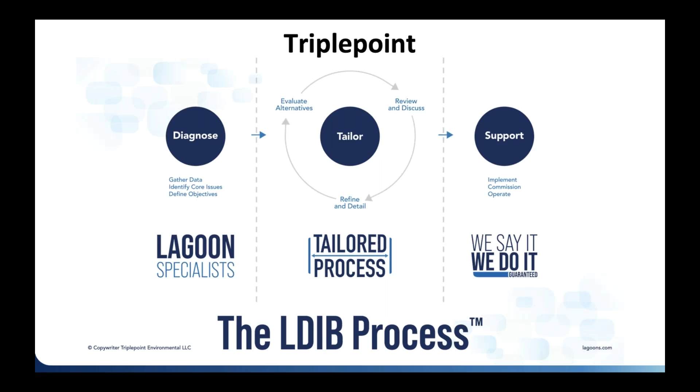So recirculation - I always crack this joke. It's like we've all seen the pharmaceutical commercial where they're like, do you have problems with lagoon DO, algae, effluent ammonia, effluent BOD, effluent TN, effluent concentration volatility? Well, you should talk to your doctor about lagoon recirculation, because lagoon recirculation is something that can help with all of these things. I'll go through this in this presentation, but we first learned about lagoon recirculation from Steve Harris.

Steve is a consummate lagoon expert. We worked with him co-hosting a bunch of training for lagoon operators in Missouri and Iowa and other parts of the country, and also doing webinars. Part of what he did was he was always hired by the EPA or state EPAs to come in and solve lagoon problems - this lagoon's not working, solve this problem. And a lot of times he would recommend recirculation.

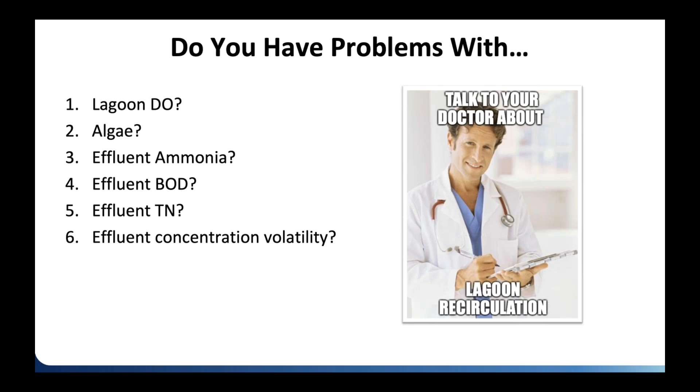And it's actually not really a new concept. It's something that's actually been borrowed from activated sludge. Activated sludge has been doing recirculation for a really long time. What it is, simply, is moving water from one part of the lagoon system to another part. So it might be pulling out of the effluent pond and putting it into the primary pond - that would be a very common application. But really, you can put water anywhere you want in the system.

And I'll explain why it helps. Some people get confused by this, the recirculation of water. We typically recommend about 1 times your average daily flow. So if your average daily flow is 100,000 gallons a day, we recommend recirculating 100,000 gallons a day to the front.

And sometimes initially people look at this and get confused, like, wow, that's a lot of flow. What happens to all this flow if we're sending 100% of what we bring into the plant to the front? Do we discharge? I think what's important to know is this sort of sounds like circular logic in a certain sense. It takes a minute to get your head wrapped around it.

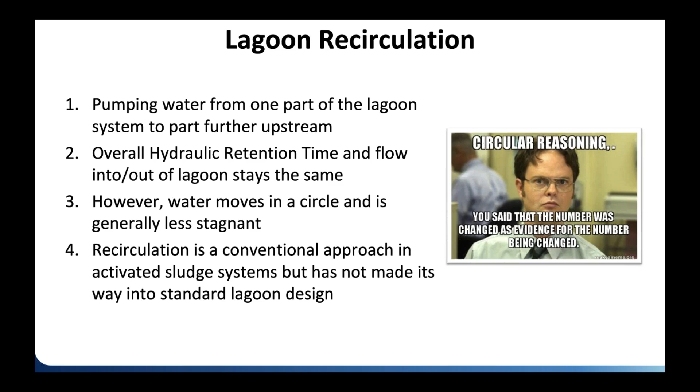That might be true for where you're circulating water from the back to the first lagoon, and you might not discharge for a few hours while the whole system equalizes. But ultimately, the time that the water stays in your lagoon system, what we call hydraulic retention time, remains the same.

And so this is the equation for hydraulic retention time. Very simple equation. It's the number of gallons per day flow you've got coming into your lagoon divided by the volume of the lagoon.

With recirculation, if you look at this equation, you're not adding flow to the lagoon. What's coming in from your collection system is remaining the same. The volume is not changing either. So water does come in and flow back out. It just goes around in a circle one more time than it would have.

If you think about it in terms of a gallon of water coming in, and we could watch it as it goes through the system, it would stay in the system for the same amount of time. It would just go around the circle twice. At the end of the day, the equation stays exactly the same for recirculation.

It's pretty interesting. I've always gotten a little confused by it initially, until I really started thinking about it and got back to this equation, and that made a lot of sense to me. I'm like, oh yeah, of course, we're not changing the hydraulic retention time. We're just moving the water around more.

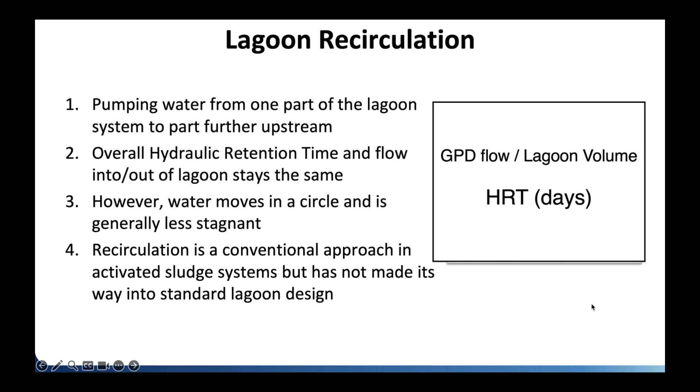As your BOD decreases, your DO tends to increase, which makes sense because BOD is biochemical oxygen demand, with an emphasis on oxygen. At the beginning of your influent, you've got a lot of this BOD in the water that's consuming oxygen. As it moves through the system, that depletes the dissolved oxygen. And as it moves through and you get less and less BOD, the water is able to hold more oxygen.

At the back of the plant, you tend to have about 5 or 6 milligrams per liter of oxygen. At the front of the plant, you tend to have a lot less - sometimes 1 or under 1 milligram per liter of dissolved oxygen. So if you need more DO at the front, then pumping water from the back to the front helps to boost your oxygen levels in the first lagoon. Makes a lot of sense.

The second reason you tend to get a lot more oxygen at the back is that you grow algae, typically at the back of your plant. Algae, like any plant, when sunlight is on it, photosynthesizes and converts carbon dioxide to oxygen, and that turns up as DO in the water. So that algae helps boost oxygen at the back of the plant. Again, you can take that, move it to the front of the plant, and give yourself a little oxygen boost.

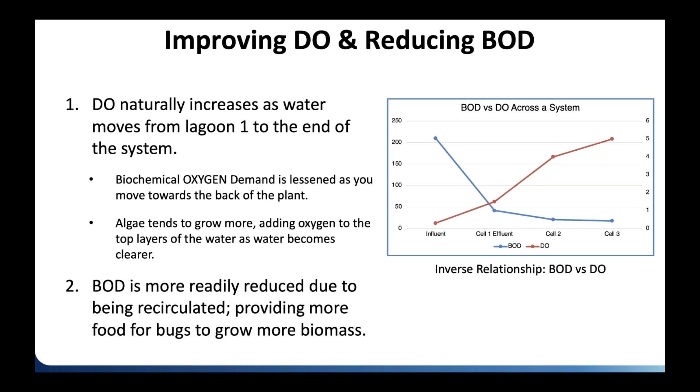It's really simply a matter of giving that BOD a second chance, a second bite at the apple to break down where there are bugs that will eat it at the front of the lagoon.

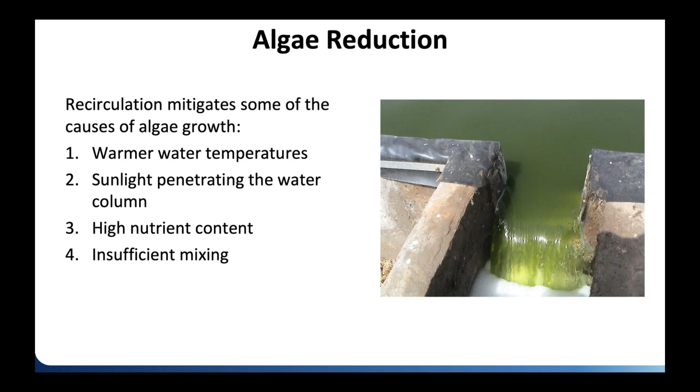There are other methods. We're going to have a whole webinar on algae coming up that will deal with how to mitigate an algae issue as it shows up. So I don't want to sit here and say this is going to solve your algae issue - it's not going to solve it per se, but it will certainly help a little bit.

All right, so let's talk about how recirculation can help with reducing nitrogen levels in your lagoon system. Before we get into that and talk about some case studies around this, let's just do a quick chemistry lesson on what nitrogen is, okay?

There are different forms of nitrogen that make up total nitrogen. First you've got ammonia and ammonium, NH3 and NH4 respectively. These together are ammonia nitrogen.

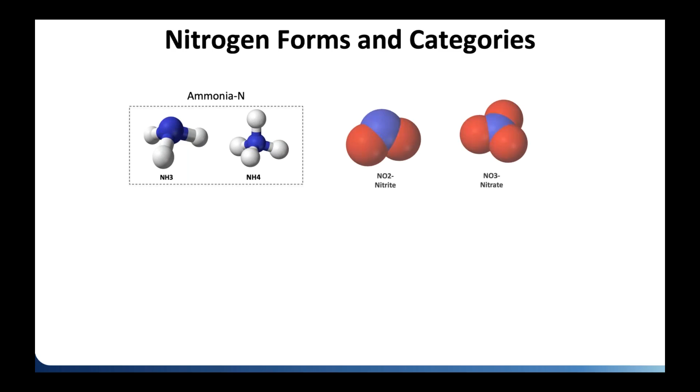Then you have nitrite and nitrate, and finally organic nitrogen. All these things together make up total nitrogen. So think of it as an adder: it's ammonia plus nitrite plus nitrate plus organic nitrogen.

We'll talk about nitrification in the next slide, but what you do when you nitrify is convert the ammonia into nitrate. So you're really not removing the total nitrogen, you're just converting one form of nitrogen to another.

Now, the different terms you hear about nitrogen include TKN, or total kjeldahl nitrogen. This is simply the combination between ammonia nitrogen and organic nitrogen. It's important to know what your organic nitrogen is.

In lagoons, it's harder to directly treat for organic nitrogen. Because the organic nitrogen can sit in the lagoon for a while, sometimes it will get hydrolyzed and turn into ammonia. But ultimately, there's always going to be a component of the effluent stream that's organic nitrogen, which is basically impossible to treat for in a lagoon system. So it is important to know.

If you're a typical standard municipal lagoon, you'd typically see about 3 to 4 milligrams per liter of organic nitrogen on your effluent, maybe even 5 or 6. If you have an industry coming in, your organic nitrogen might be a lot higher.

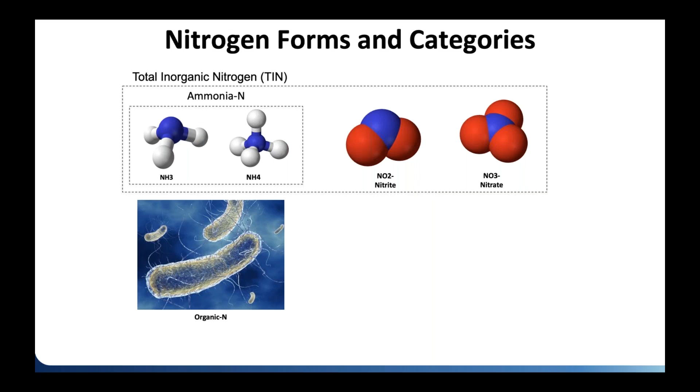It will indirectly do it throughout the process and hydrolyze some of that organic nitrogen into ammonia, but ultimately there's still always going to be some organic nitrogen, and it's not something lagoon operators can really control. So I always like it - if you're going to give a limit to somebody, at least give them a limit for something they can control, like total inorganic nitrogen versus just total nitrogen, which has that organic component you can't control.

So with recirculation, the premise is that you can accomplish total nitrogen removal. With a municipal lagoon, most of your nitrogen coming in is ammonia - the vast majority of it. So the first thing you have to do is convert that ammonia first into nitrite, then into nitrate. You do that by growing nitrifiers.

Now we have an entire webinar on nitrification, which you can look up on our Lagoon University website. I won't go into too much more detail other than the process. Then once you get into that nitrate form, you can convert it from nitrate to nitrogen gas. Really cool process, right? You're literally taking the nitrate out of the water and it just off-gases into the atmosphere and it's gone.

So why would you want to denitrify? The obvious reason is you've got a total nitrogen limit or total inorganic nitrogen limit, then you've got to meet that limit, so you have to denitrify. That's fine, but I'd argue there are benefits to denitrifying even if you don't have a limit. Here are the two primary ones that I see.

First of all, for every 1 milligram per liter of nitrate denitrified, you get 3.57 milligrams per liter of alkalinity that is produced. This is cool - it's a cool feature, it just gets produced and put in the water. Why do you care about that?

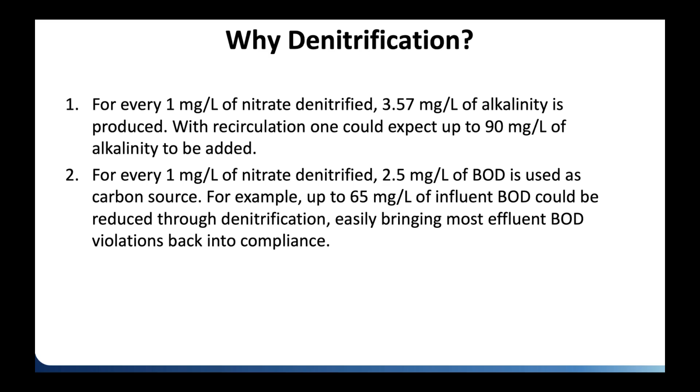If you want to do anaerobic digestion, that's free, except it's very, very slow. So there are 2 really good reasons to do this, even if you don't have a limit.

So the rub is that most of your total nitrogen coming in is from ammonia. You have to nitrify it to make nitrates, to convert it into nitrates, before you can denitrify it. So what do you need to nitrify? Well, you need low BOD, you need alkalinity, you need ammonia, and you need high DO, okay?

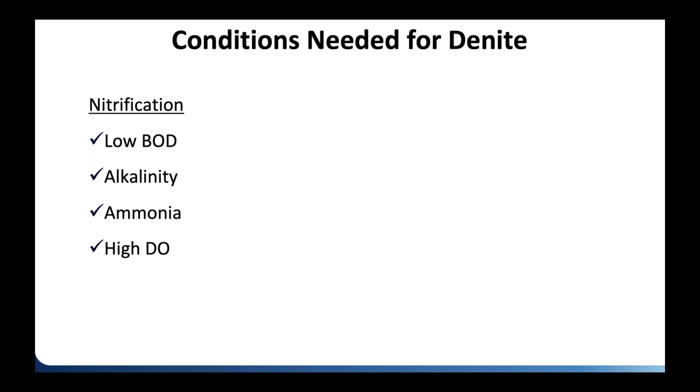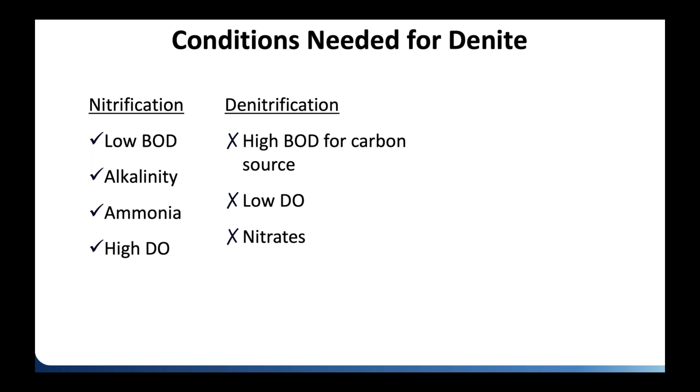Now, the problem is that a lot of the things you need to denitrify are the opposite of what you need to nitrify. If you're trying to denitrify, you need nitrates, so you've got to get rid of the ammonia and turn it into nitrates. You need low DO, you want under 0.5 milligrams per liter of dissolved oxygen or lower, and you want BOD because you need that as a carbon source.

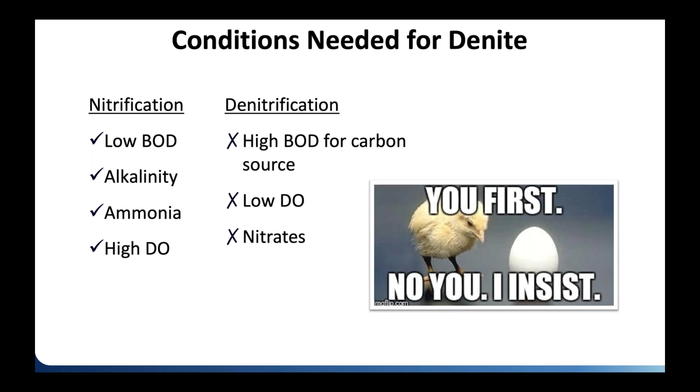So it's the quintessential chicken and egg situation, because in order to denitrify, you have to nitrify first, but in order to denitrify you need a lot of the opposite conditions you need to nitrify. So this is where recirculation comes in, okay?

This is our process. This is the way we approach it. You could do it a lot simpler than this, but I'm going to explain our process and why we do it the way we do it.

In our process, we start with BOD treatment in these aerated lagoons. Then we run it through our NitrOx ammonia removal process, which will basically nitrify any water at pretty much any temperature, especially within a municipal system. The only caveat is the water can't be an ice cube. But other than that, it'll nitrify it, create those nitrates, and then we pump that water back, blend it with the influent water coming in from the collection system, and put that into an anoxic lagoon right at the front of the process.

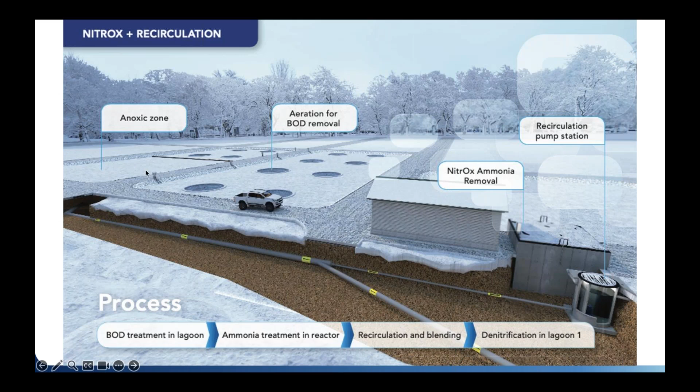So modeling: there isn't a specific biological model available for this type of denitrification. We are actually trying to develop that by doing piloting and gathering more data so we can get more predictability about it. But off the bat, we sat down and said, okay, let's just think about this for a second, theoretically make some assumptions and see where we go.

Now, in reality, I can say today that we probably get 90 to 95% nitrate removal within a pre-anoxic lagoon. So really, really high rates of removal. But you do want to recirculate more.

It makes sense because in order to get rid of nitrates, you have to take the nitrates and put them somewhere where they can degrade, and that's in that pre-anoxic lagoon. So the more of those nitrates you put back in the front, the more they're going to degrade. Totally makes a lot of sense.

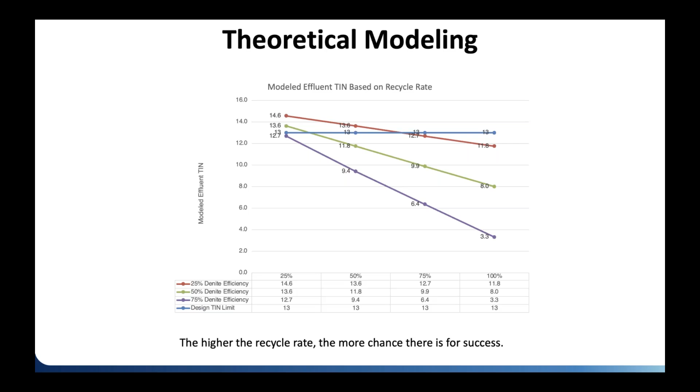Okay, so blending. Why would you want to blend your recycled water with your influent water? And why do we think this is important? Now, you don't have to - you can just recycle back to the front. Totally your call.

But with blending, I think what's really cool about it is that you are taking that high DO water from the reactor and mixing it with the influent water that has low DO and high BOD. So what you do is you get all this mixing in the pipe, the DO gets depressed, and by the time it gets put into the pre-anoxic lagoon, right here at the front, you've already got the water kind of primed and ready to denitrify within the pre-anoxic lagoon itself.

And they had a spill, and they had a bunch of water that had a lot of ammonia in it sitting in the lagoon, and they had to treat the ammonia because they couldn't discharge it the way it was. So we came in and said, okay, we can do this for you.

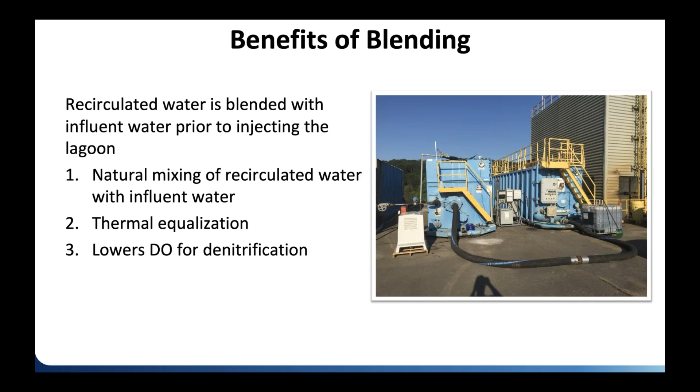So we pull a sample there, and lo and behold, we're getting like 5 milligrams per liter of nitrates out of this thing. So somehow we were growing the bugs in the reactor. The BOD was flowing through from the carbon source. It was mixing in the pipe, and it was denitrifying in the pipe, which was crazy. And that always stuck with me over the years. I'm like, this is just cool. I don't know why this is happening. It's kind of crazy. It kind of makes sense to me.

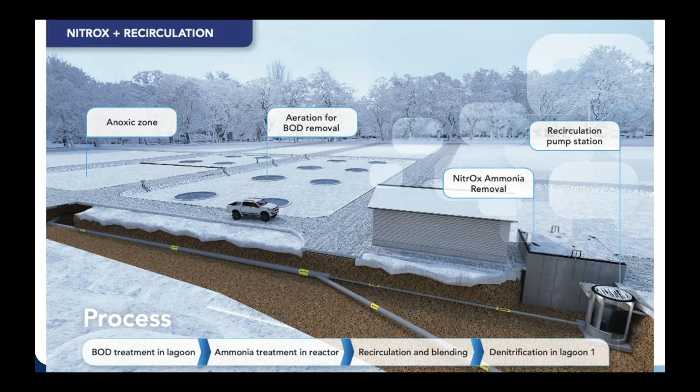So when we came to develop our own process for recirculation, we got to blend. We got to blend because this is really going to help out. And you'll see in this pilot that we did that it's been very successful.

So why an anoxic zone? So you don't have to have an anoxic zone. If you have a partial mix aerated lagoon system, you can just recirculate back to the front, and assuming you don't have too much density of aeration, you're very likely to be okay, and you will get denitrification in that lagoon, partial mix aerated lagoon, depending on how big it is and how long the retention times are. However, we like a pre-anoxic zone.

One of the reasons is in a pre-anoxic zone, we know we're going to have pretty low dissolved oxygen. So this was a plant we worked on. This is one I did a sludge survey on and a DO profile on. These blue boxes on the left here show you different DOs at different depths. And you can see in this pre-anoxic zone, we are regularly seeing under 0.5 milligrams per liter of dissolved oxygen in the lagoon.

Which means that we can really get really fast and incredible denitrification within the lagoon. The second piece of it is that when you have a pre-anoxic zone, it can kind of act like a sludge sink, and it can allow a little bit of pre-treatment of solids that can sink to the bottom. It can also allow some of the rags and some of the stuff you don't want to get into your aeration system to sink and settle, because rags will clog up any aeration system known to man. I don't care what kind of aeration you have, rags will ruin your day. And so when you can settle it here at the front, you're less worried about rags.

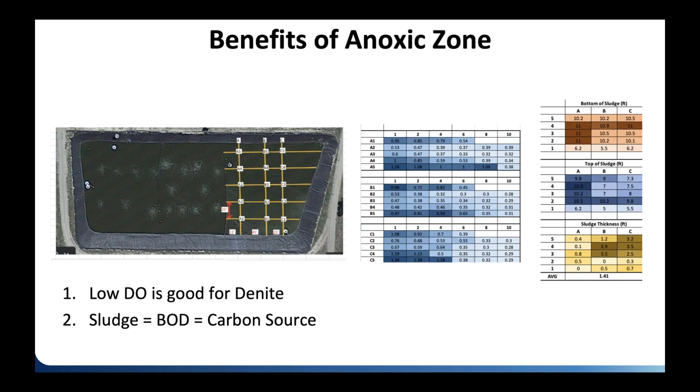And then finally, that sludge is full of BOD, right? It's a settled BOD. And as the water's coming into the lagoon, being blended and then coming into the lagoon, it bubbles up through that sludge. And that is really good. It's good for a carbon source, good for low DO, and it's good for the bugs. The bugs are living in that sludge, and they're breaking that stuff down in the sludge. So we do like a pre-anoxic lagoon when it's possible.

So mixing. I kind of seen this meme, this might be a little dated now, but this guy who likes to put up a sign, put a controversial statement on it, and then say, change my mind, and sit out in public and have people walk up to him and talk to him about why this controversial statement is wrong. And so I always find that kind of funny because, if you look it up on YouTube, you'll find some interesting videos. But I've always thought, my 16 years of doing this, mixing is the solution to 90% of lagoon problems.

And the reason for that is that, fundamentally, to treat wastewater, you're trying to get the bugs, the food, and if you're aerating, the oxygen together. And the better job you do that, the faster treatment you get, the happier the bugs are, the more microbes you grow, et cetera, right? And so in the same way with the pre-anoxic zone, if you're able to put a little bit of mixing in there, you can get the bugs and the food together, you're going to get better treatment, and you're going to get better treatment kinetics.

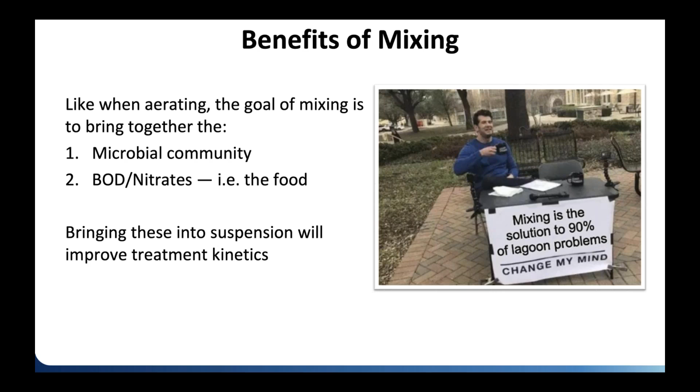And I can prove this to you here in a couple of different slides because we actually have some data on it. So typically we would do that, and this is like my, I apologize for this, this is absolutely dated. It's my hack lagoon mixer job. We were pumping water through that to kind of spray out these nozzles, and it was a bit of a joke. Rev 1, just testing, not what we sell today. But we do have a more developed and better system.

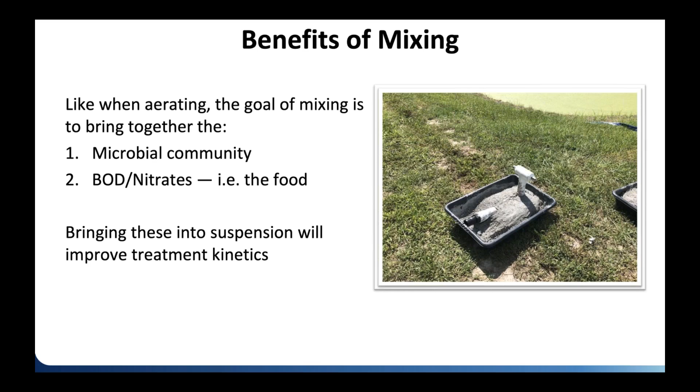But this is the type of thing where you can drop it in the bottom of the lagoon. It can either spray water or burp air to create a little bit of mixing for a short period of time, and then stop, and can really make a big difference in treatment.

Now, if you don't want to have a pre-anoxic zone, or you can't, and you have aeration, you can simply cycle aeration. This is an idea borrowed from activated sludge plants. They do the same thing, cycling air on and off. Think of an SBR doing that exact thing. You can do that by simply putting a valve.

In our case, we have this header connected to a blower, with manifold points along it. Each manifold for our system has a dedicated valve for each aerator and air line going out to each aerator. What you can do is isolate the manifold by putting an electric actuated valve on a timer. If you have a surface aerator, just put it on a timer.

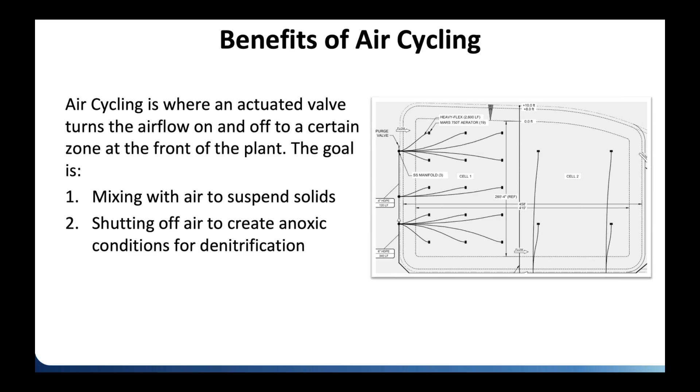If you cycle it—let's say an hour on, an hour off, or 3 hours off, 3 hours on, whatever cycling works best—you can get the aerobic treatment you need, and you can get the anoxic treatment you need, without having to have a separate anoxic basin.

Finally, one thing to consider if you're trying to get denitrification is to think about covering the lagoon. You saw from that previous DO profile that they were getting pretty good anoxic DO, under 0.5 throughout most of the lagoon, but that lagoon is 10 feet deep. For a lot of lagoon systems that are facultative, they're only 5 or 6 feet deep, and one reason is that they rely on wind blowing across the surface, mixing the water a little and creating oxygen transfer at the surface.

That's great if you're trying to get aerobic treatment, but if you're trying to get anoxic treatment, you're not going to have much of a water column to create an anoxic zone for denitrification. So you may have to actually cover the lagoon to prevent that air-water contact, and therefore get the anoxic DO you might want.

On a big facultative lagoon, chances are recirculation without a cover will probably be fine. But it really depends on your sludge levels, how much algae is growing in the lagoon, and so on. A cover can really help—let's say you created a baffled zone at the front with 3 or 4 days of retention with a cover on it. You're going to limit algae growth, limit surface oxygen transfer, and be able to create anoxic conditions.

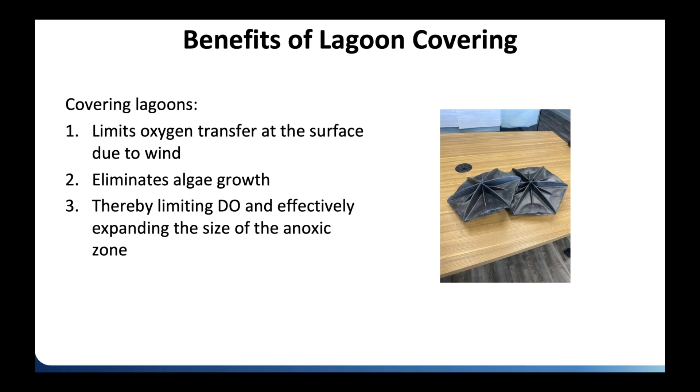So we partner with a company that creates these hex tiles. You dump them in, they nest against each other and create a really nice, tight cover on top of the lagoon—very easy to install and fairly inexpensive as covers go. Something to consider: covers can really help, and I think shallower lagoons are really where these things are going to be worth it. Deeper lagoons, less so, because you tend to get pretty good dissolved oxygen conditions in anything 10 feet deep or over.

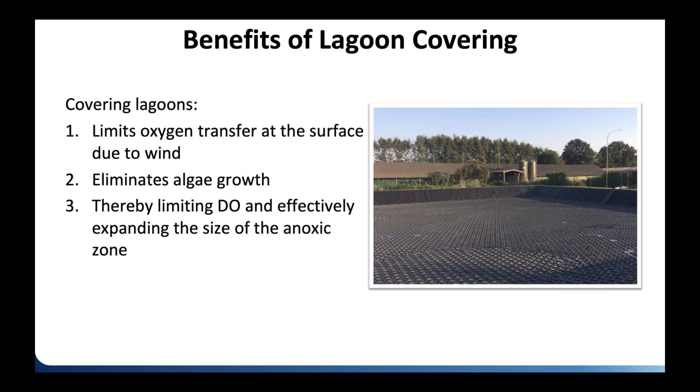So, a case study. I mentioned this facility prior—it's up in the Rocky Mountains. This lagoon system, about 3 hours away from our office, is getting a total inorganic nitrogen limit. They have one right now of 13. It will later go down to 10 milligrams per liter.

So if you're a lagoon system and you get a limit like that, what do you do? You certainly could replace your plant with a mechanical plant, but it's very expensive and much more operator intensive than a lagoon system is. So the thought came up: why don't we recirculate?

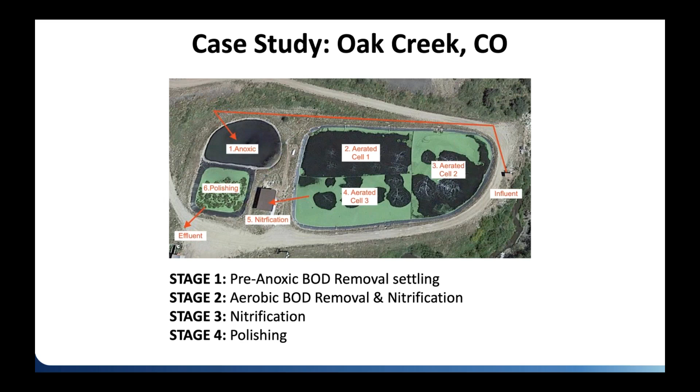So what we did was we looked at this and said, okay, if we're going to implement recirculation and try to hit their total nitrogen or total inorganic nitrogen limits, how are we going to approach this? We started layering in different phases, getting more intense as needed to hit their limit. First thing to do is recirculate back to the front and blend the recycle with the influent water.

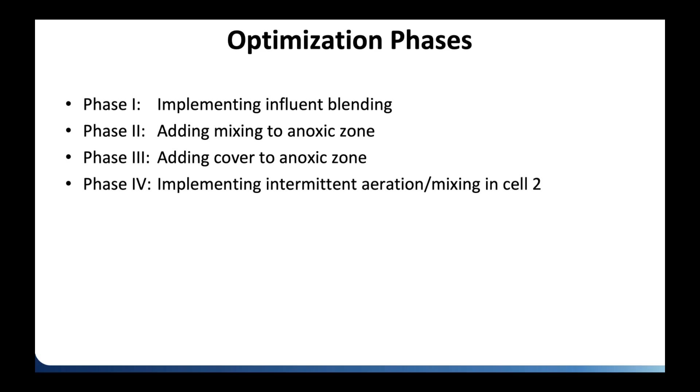Second phase was adding mixing to the anoxic zone. Third phase was potentially covering it. Fourth phase was potentially cycling the air within the aeration basin to essentially extend the anoxic zone into Lagoon 2. We didn't actually have to do phases 3 and 4. We did phases 1 and 2, and we were able to get the numbers we needed.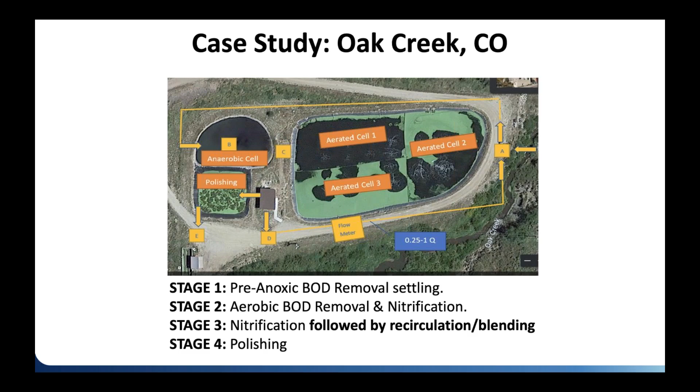First thing we did was we looked at the sludge. Again, me out and about, setting up a grid, measuring the top of the sludge blanket, taking core samples, trying to understand how much sludge they had in the lagoon.

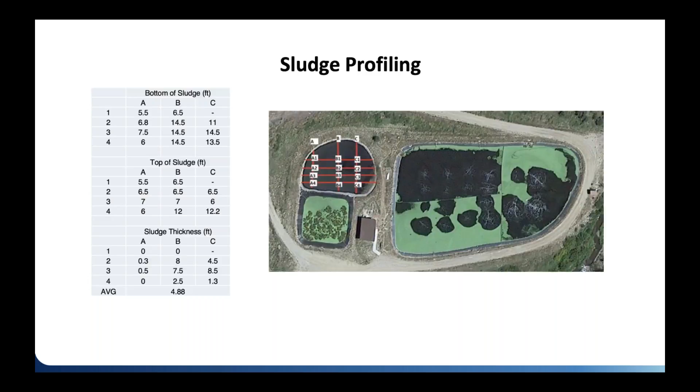At the same time, we did DO profiling, looking at what DO and temperature is at different intervals within the water column in 2-foot increments. This lagoon is approximately 16 feet deep. What we found with the DO profiling is that the anoxic lagoon was really, really good - very low in dissolved oxygen, which is what we were looking for.

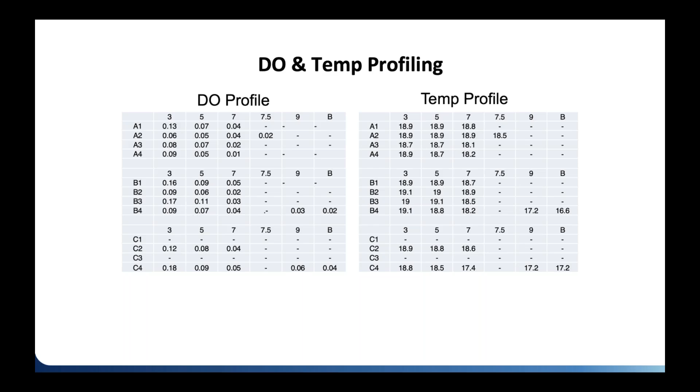So we set it up. We put 4 pumps in there, effluent to the MBBR. These were just simple, low horsepower pumps. If you're recirculating, you basically have very little lift, so basically no head on these pumps, and so you don't need big pumps - these are half horsepower pumps. And we put 4 in because we wanted to be able to have 2 running, or 1 running, or 4 running to try and change the recirculated flow for testing purposes.

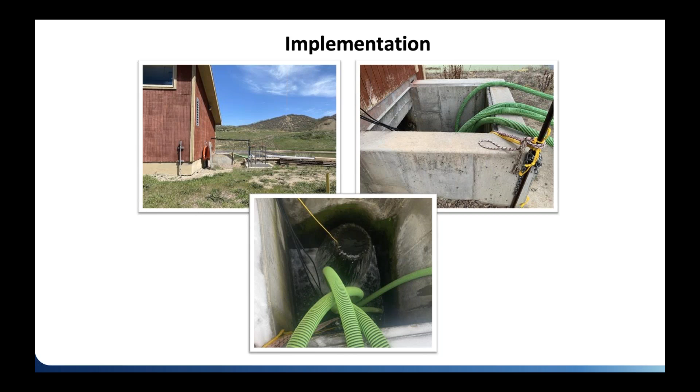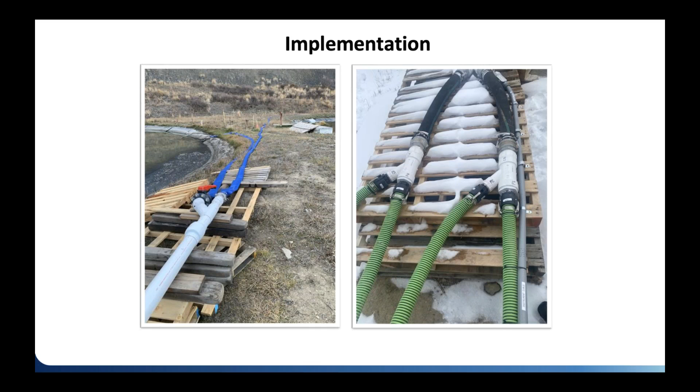Obviously, this is set up as temporary for the minute. All that water comes in, gets tied together from the 4 pumps, then flows through the blue fire hose there, all the way up to the front of the lagoon. The blue line on the left there is simply an emergency bypass if we need it at some point, but it is not generally in operation.

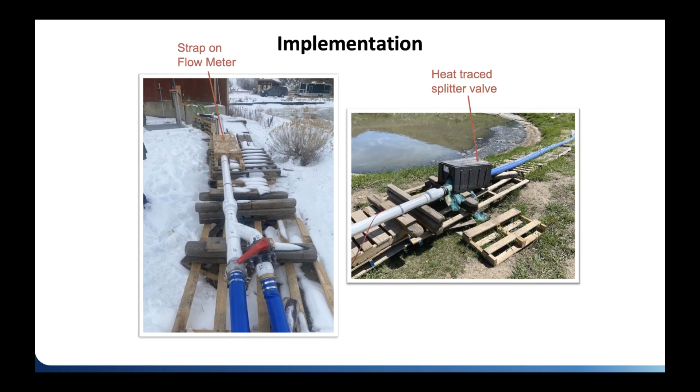So a couple things we put in: we put a flow meter here to measure the recirculated flow, and then we heat traced and insulated the splitter valve there so that it wouldn't freeze on us and cause a pipe burst. We didn't have any issues - despite the cold temperatures up in the Rocky Mountains, which can get super cold at night sometimes, it seemed to hold up, at least this winter that we did it.

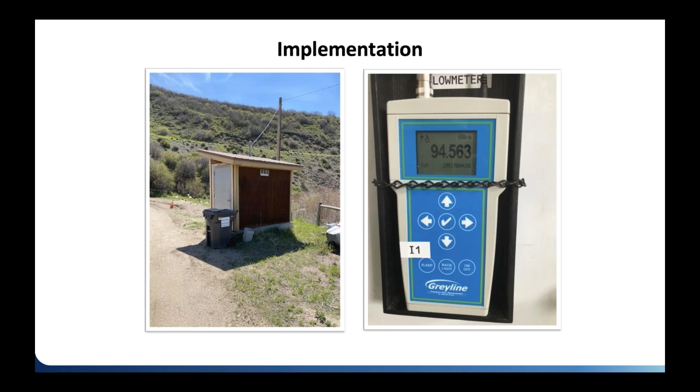That is the influent building on the left there - all the water comes in there. The influent, the recirculation flow meter readout there, 94 GPM, which is right around 1 Q, so 100% of the daily influent flow. Everything came in, and the recirculated water was actually fed directly behind the existing bar screen into the pipe that blends with the influent water and back to the front of the lagoon.

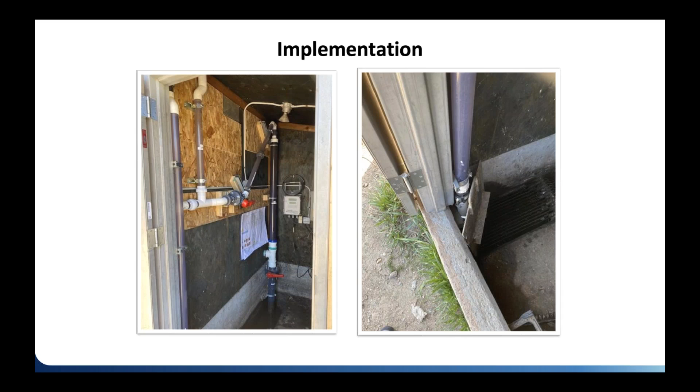So how'd it go? Well, they were doing some recirculation before we started, and they had a 1.5 horsepower pump that was pumping from the back of the MBBR directly into their pre-anoxic lagoon. So the first thing we said was, we've got to put this back to the front and blend it. So we put our recirculation system in, turned it on, and it goes all the way to the front.

And that's when we started seeing a pretty big drop off. As soon as we started recirculating to the front, we started to see data that was a lot lower. Then, as we got into fall, the temperature started to decrease in the lagoons because it got colder outside, and we started to see a drop off going into January and February. We got to the beginning of February, got a month's worth of data from January, and were kicking around the office.

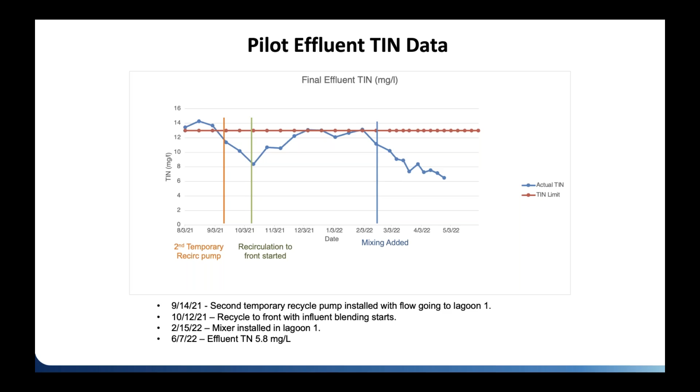We were hitting the limit of 13, but we really thought this could be better. How do we do this better? So we actually installed mixing in the anoxic lagoon, and as soon as we installed mixing, the numbers started to go downhill from there. It's very clear that mixing made a big impact in that pre-anoxic lagoon in terms of getting the effluent total inorganic nitrogen to go lower, despite what the temperatures are. This is the same graph, just showing you the temperature drop.

As the temperature was dropping, we did anticipate and did see the bugs start to get a little strained and not be able to do as much removal. Then we put the mixer in, and boom, the bugs started to get more access to that food and do a better job. Despite the temperatures being really low, we kept seeing a precipitous decrease in the amount of total inorganic nitrogen coming out of the plant. Very clearly, we can do this in very cold temperatures. The lowest observed temp we had was 2.6 degrees C in water, and denitrification was still really working very well when we had mixing in the basin.

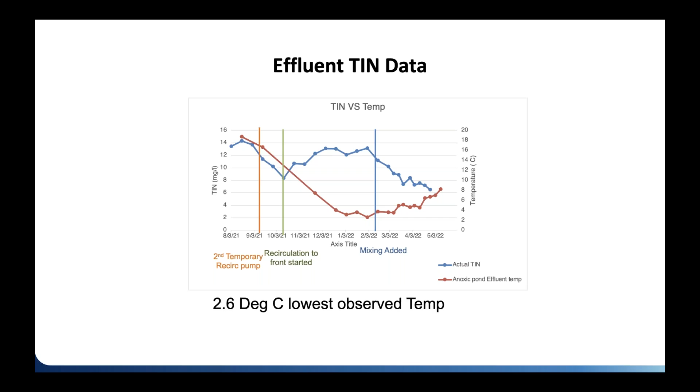This kind of shows you - I like this slide a lot because it gives you a visual of total inorganic nitrogen, or total nitrogen in this case. As I said before, as it comes in, a lot of your total nitrogen is ammonia. In the case of Oak Creek, which seemed kind of unusual to us, they had like 10 milligrams per liter of organic nitrogen in their influent, which seemed kind of high, but it can happen. Only a little bit of that total nitrogen coming into the lagoon was NOx, or nitrate and nitrite. Then you go through the post-anoxic, an anoxic lagoon, and all of a sudden you've dropped a whole bunch of that organic nitrogen. You've dropped a whole bunch of that nitrate because you're recirculating back to the front. So you're seeing this precipitous drop in total nitrogen, which is awesome.

But you still have - you've really reduced your NOx, or you've reduced a lot of the total nitrogen, which a lot of that's from denitrification. But you still have that because you haven't gone through your nitrification reactor. Then you go from there into the nitrification reactor, and now all of your ammonia is gone, right? Which makes sense - that's what the nitrification reactor is supposed to do. It's supposed to take that ammonia and convert it to nitrate. So you saw a little bit of a drop there, and then you're recirculating, and it's going through the polishing pond and out.

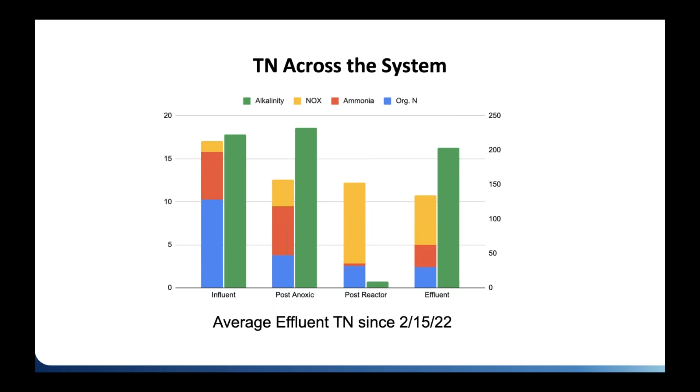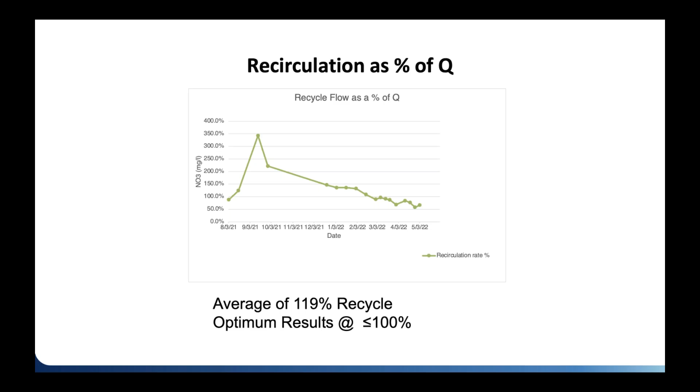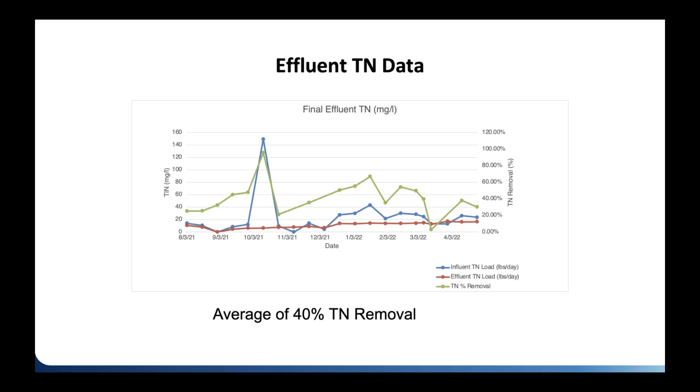In terms of total nitrogen removal, we got about 40% across the system. Again, the cool thing about recirculation is you tend to get very stable loading on the effluent, right? Because you've got a lot of this blending that's going on, a lot of lagoon that's equalizing, but your influent total nitrogen is going to spike around based on I&I and different factors that are going on. But overall, we saw about 40% pounds per day removed from the recirculation system. So certainly making a dent in the total nitrogen. This is where it goes back to what's going on with this ammonia situation in this lagoon.

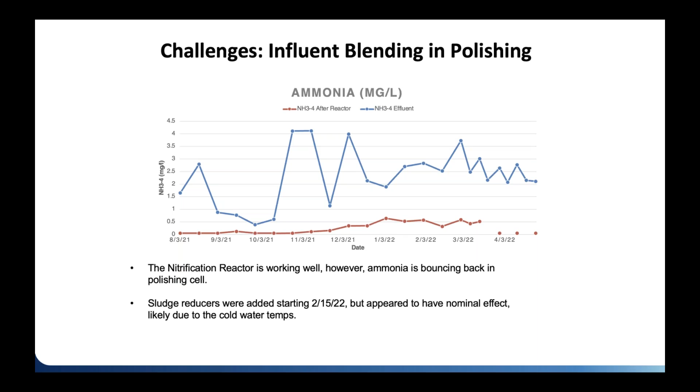This is something I think we can fix with a full-scale implementation. You can see the reactor, the red line there, was showing basically zero ammonia, or very low ammonia coming out, maybe 0.5 to 1 milligram per liter in the wintertime. But yet the effluent ammonia was really high. So why is that happening? I mean, yes, we're recirculating, but once it gets through the reactor and flows into the polishing pond, it shouldn't have any more ammonia in it. So why is this happening here?

The second thing you'll notice here is that of the total inorganic nitrogen coming out, a big piece of that, more than it should be, is ammonia nitrogen. And it shouldn't be there. This is why we think we have even better room for improvement, where we can hit under 10 total inorganic nitrogen on a regular basis if we can get rid of this ammonia.

So what we found is a couple things. There's basically some inadvertent bypass going on within this system. First, Lagoon 1 can overflow into Lagoon 2 if they get a really high rain event, and Lagoon 2 can overflow into Lagoon 3, the final polishing lagoon. So that's a source of ammonia. Secondly, there's another form of bypass where Lagoon 2 can bypass the reactor into Lagoon 3. These are some of the things we're going to fix, and we actually already fixed the bypass from 2 to 3. But it's just a function of the lagoon design, and that's really skewing the numbers. So if we get rid of that ammonia, we really ought to be able to hit under 10 TIN consistently. That's the plan going forward once we remove those bypass sources.

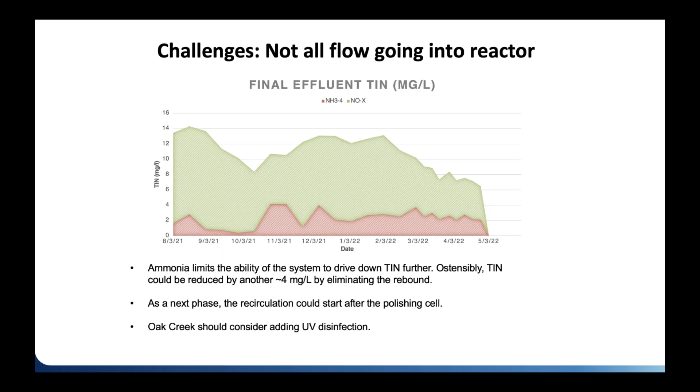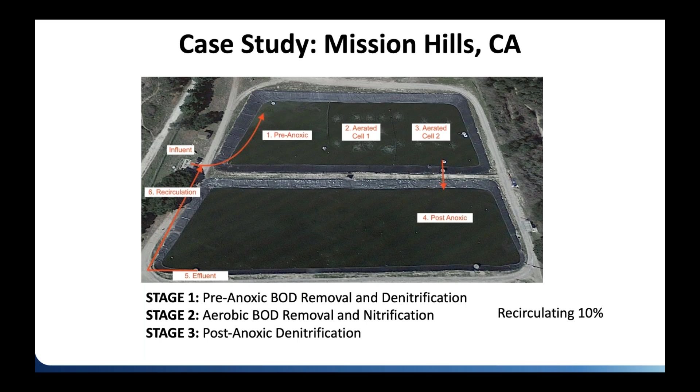We believe an anoxic cell is a really efficient way to get rid of a lot of nitrates quickly, which can really help in the overall process. Which then, again, when we get rid of nitrates through denitrification, we increase alkalinity and reduce BOD. So that's all really helpful. Overall, we recommend about a 1Q average daily recycle flow.